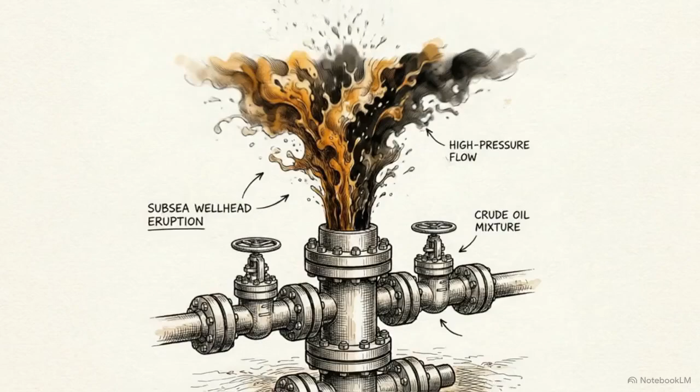What comes out of an offshore well is not ready for the market. It blasts upward from the reservoir as a dark, turbulent, multi-phase fluid. This stream is a chaotic mixture of crude oil, natural gas, formation water, and abrasive sand.

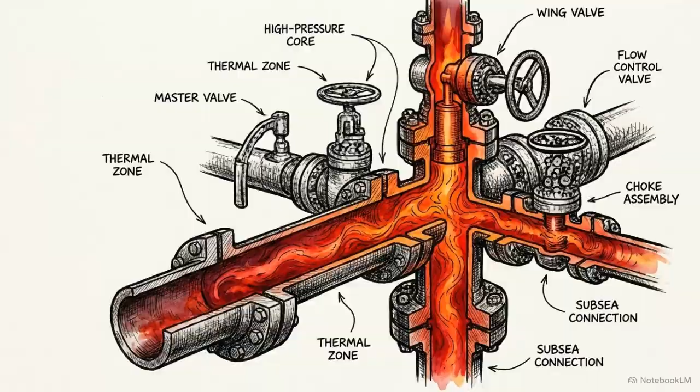It arrives at the wellhead under crushing thermodynamic conditions, sitting at pressures up to 3,000 pounds per square inch, roughly 200 bar. In this raw, high-pressure state, the fluid cannot be accurately metered, it cannot be pumped efficiently, and it cannot be transported through 100 miles of subsea export pipeline.

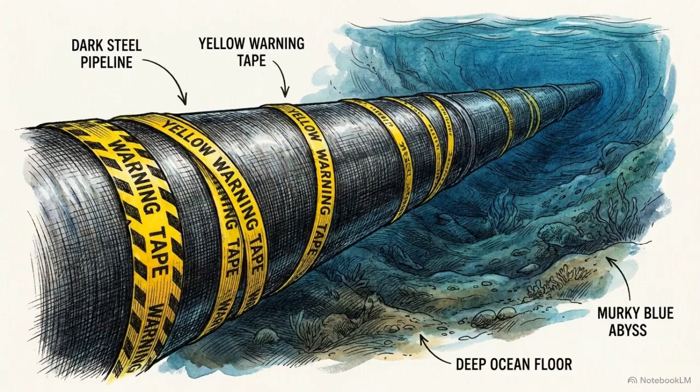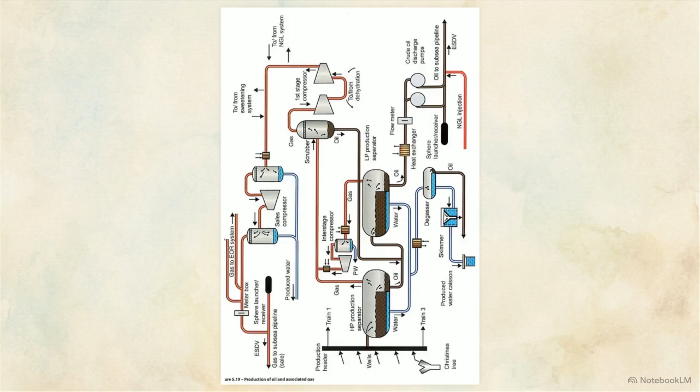The offshore process plant exists to execute a precise thermodynamic and gravitational decoupling of that fluid. To achieve this, engineers utilize a massive, interconnected macro-architecture. The lower sections isolate the liquid processing, utilizing high and low pressure separators to stabilize the crude oil. The upper sections handle flow assurance, routing gas through scrubbers and compressors for transport.

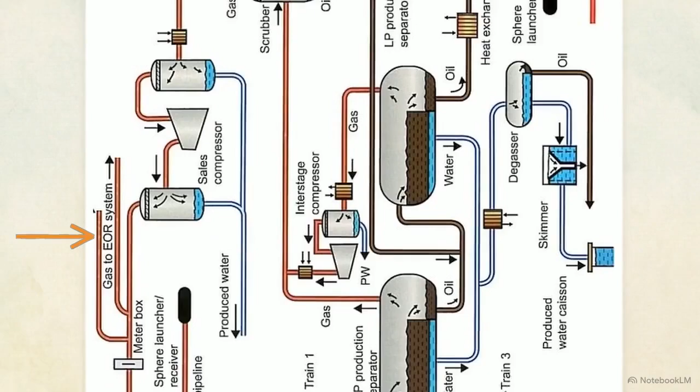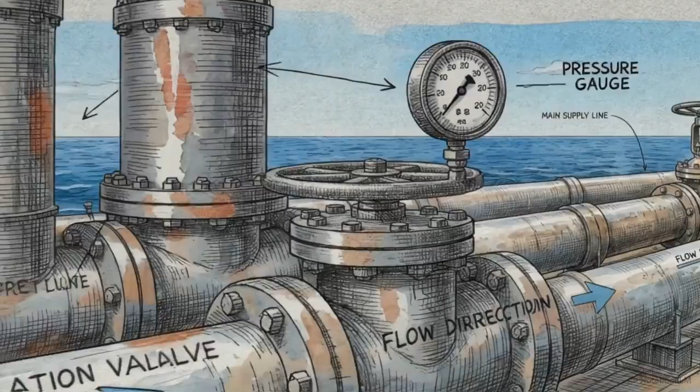Meanwhile, dedicated lines send a portion of gas back down into the reservoir for enhanced oil recovery, maintaining pressure to keep the well flowing. The offshore platform functions as a live phase and pressure engine, the only mechanism capable of forcing geological chaos into predictable, stable export commodities.

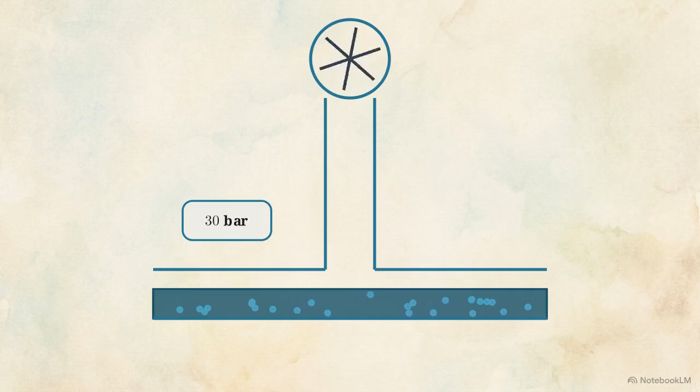The separation process begins with a mandatory pressure drop. The well stream must be depressurized to allow the intermingled gas to break free from the liquid oil. If you drop the pressure all at once, say from 30 bar straight down to 1 atmosphere, the result is violent. The dissolved gas flashes instantly, creating heavy foam and forcing liquid to surge upward into the gas outlets.

That liquid carryover travels downstream and enters the gas compressors. Compressors are designed strictly for vapor. Hitting them with dense liquid droplets causes catastrophic mechanical destruction. The engineered solution is a controlled, stepped pressure cascade. By staging the pressure reduction across a series of vessels, the gas releases gently, protecting the downstream machinery.

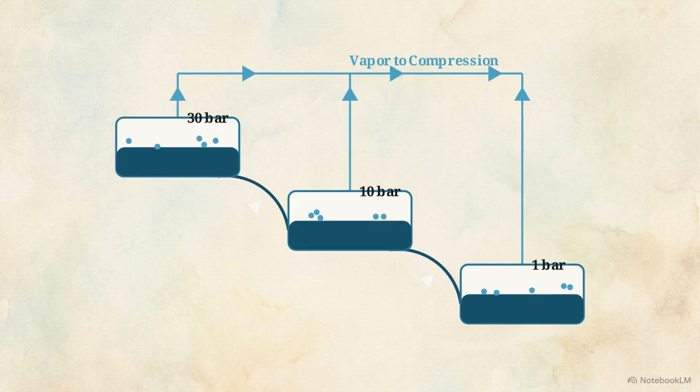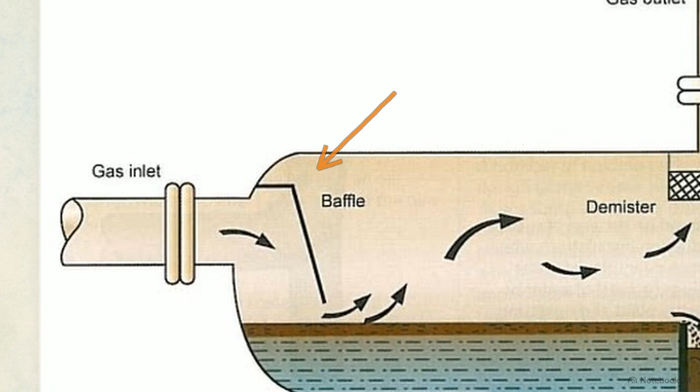The primary vessel in this sequence is the horizontal 3-phase separator. As the high-pressure well stream enters the vessel, it strikes an inlet diverter baffle. This physical barrier abruptly kills the fluid's forward momentum, forcing the initial separation of heavy liquids from lighter gases.

From there, gravity stratification takes over. Because of their varying specific gravities, gas rises to the top of the vessel, heavy formation water sinks to the bottom, and the oil floats securely in the middle.

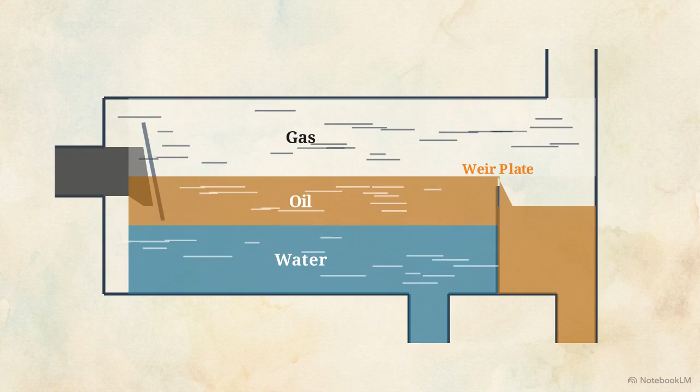An internal weir plate acts as a physical dam. The floating oil continuously spills over this weir into a dedicated collection section, while the heavier water remains trapped behind it. Above the liquid, the escaping gas passes through a demister mesh pad. This pad coalesces microscopic liquid droplets, ensuring they fall back into the liquid pool before the gas exits the vessel.

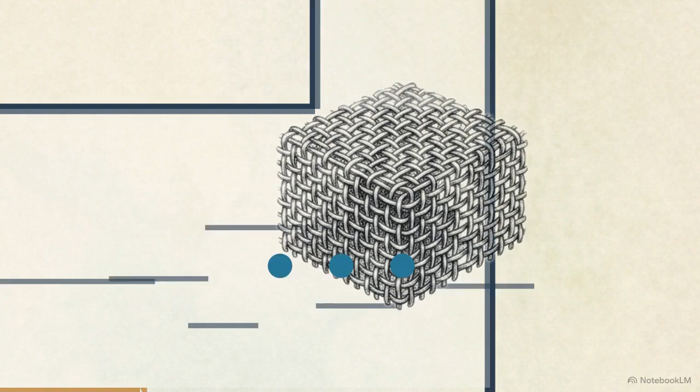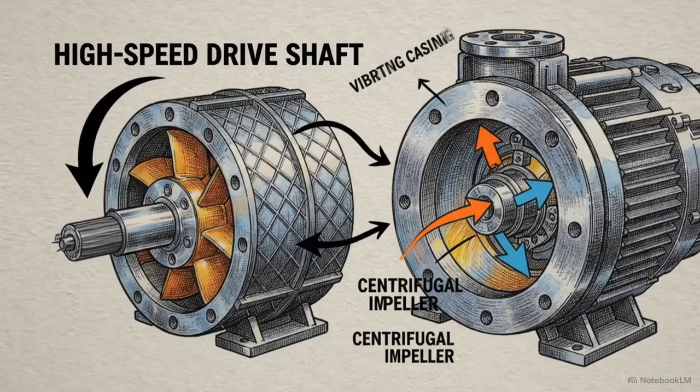The separated oil then flows into a series of low-pressure degassing drums, systematically stripping out the final traces of dissolved gas. Once stabilized, this oil meets the export pumps, which elevate its pressure back up to 750 psi, forcing it into the subsea pipeline network.

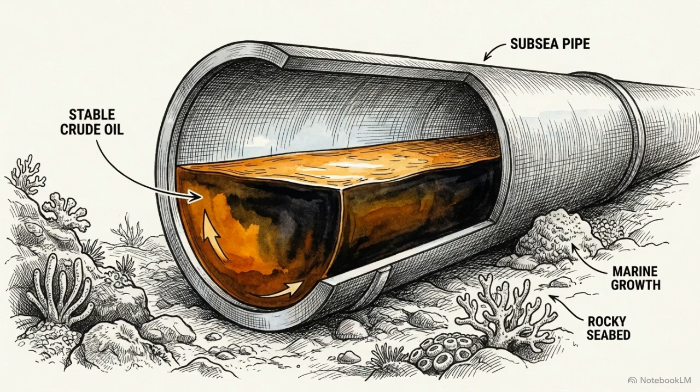This multi-stage separation process yields dead crude, a liquid stripped of volatile gases, rendered stable enough to survive the physical stresses of long-distance transport. While the crude oil is now stable, the separated gas stream presents a different engineering hazard.

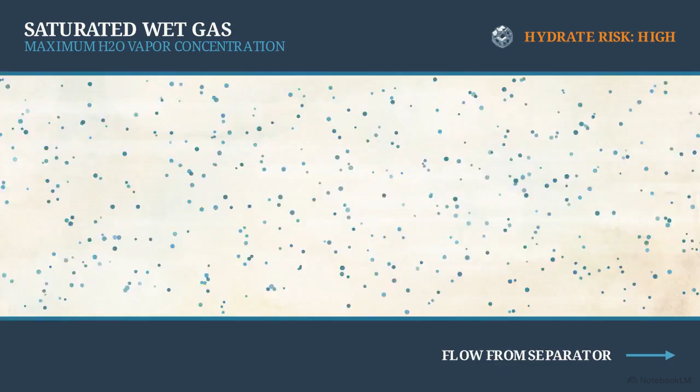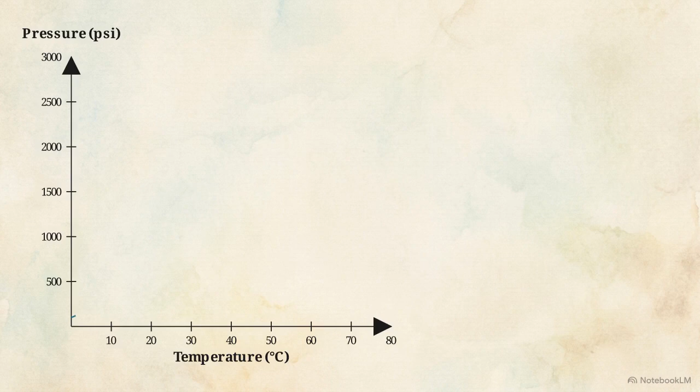As it exits the separators, it is completely saturated with water vapor. If this wet gas enters a cold, high-pressure subsea pipeline, it faces immediate thermal shock. This phase envelope graph plots pipeline pressure against temperature. The shaded region indicates the hydrate zone, the exact conditions where high pressure and near-freezing seabed temperatures intersect.

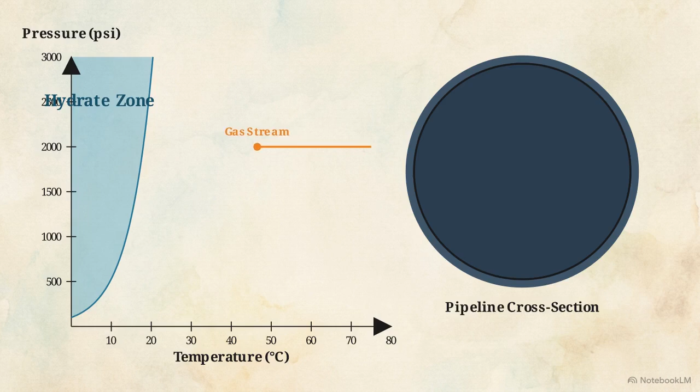When the gas stream crosses into this zone, the water and hydrocarbon molecules physically lock together. They form hydrates, solid ice-like crystalline structures that rapidly aggregate and can entirely block a pipeline.

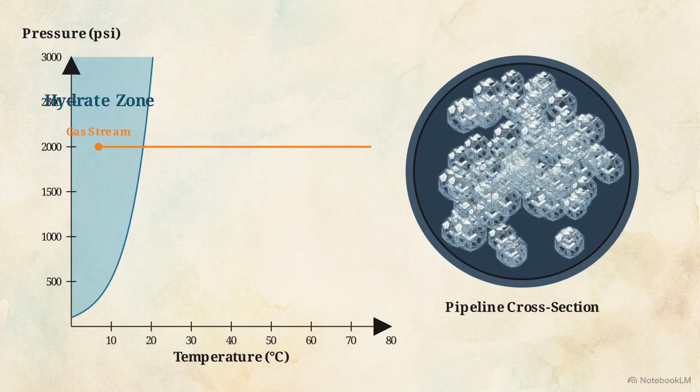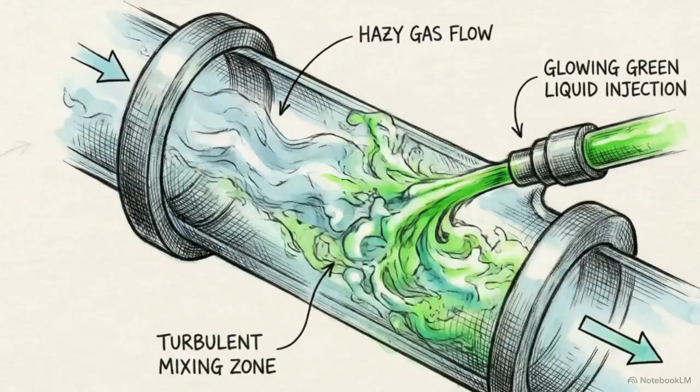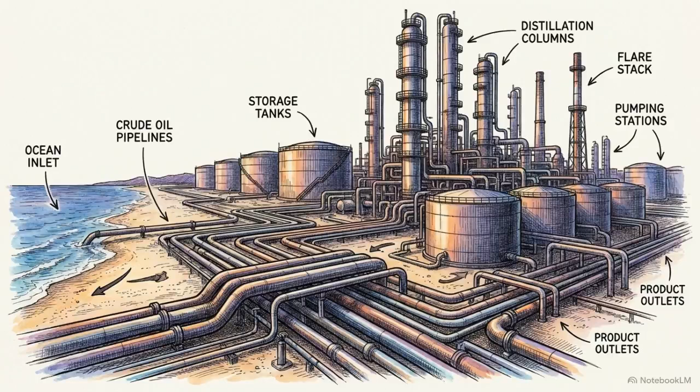The first line of defense is chemical flow assurance. Engineers inject inhibitors like monoethylene glycol, or MEG, which alter the fluid's chemistry to shift the hydrate formation threshold to a lower temperature. However, exporting gas directly to onshore refineries requires a stricter solution. The gas must be physically stripped of its water entirely.

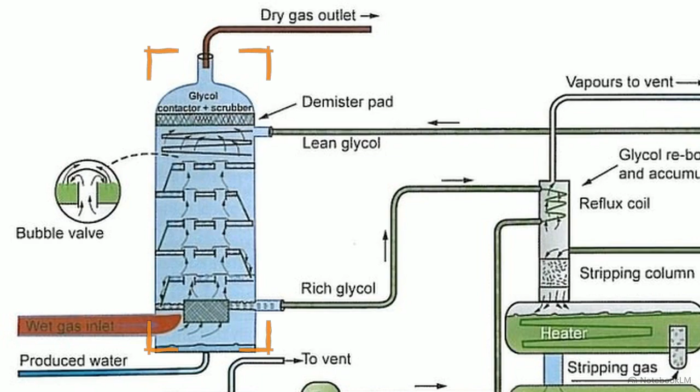To achieve dry gas export, platforms rely on a triethylene glycol, or TEG, dehydration system. Inside the vertical contactor tower, countercurrent physics drive the dehydration. Wet gas flows upward from the bottom, while dry, lean glycol cascades downward across multiple trays.

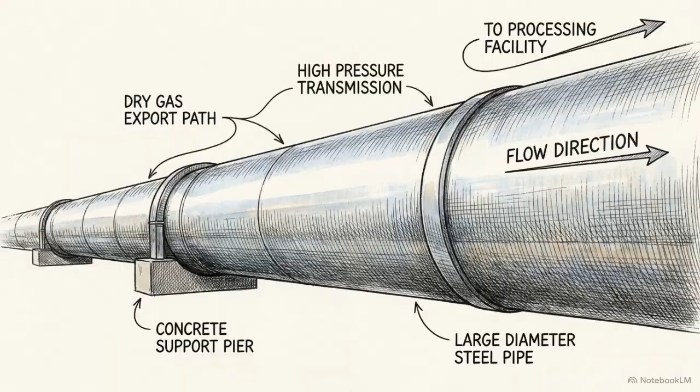Bubble valves on these trays force the rising gas to physically percolate through the liquid glycol. The glycol acts exactly like liquid blotting paper, absorbing the water vapor directly out of the gas stream. The gas exits the top dry and ready for export, while the water-saturated, rich glycol pools at the bottom and is routed to a regeneration reboiler.

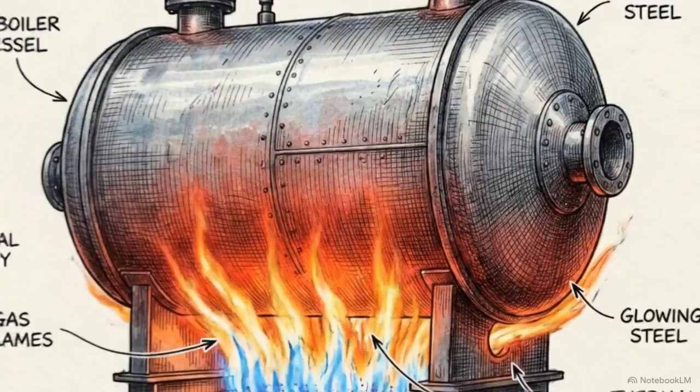The rich glycol is routed to a regeneration reboiler. The reboiler's job is to boil the trapped water out of the glycol, so the chemical can be reused. But this creates a severe thermal constraint. To guarantee the water vaporizes, the temperature must reach 200 degrees Celsius.

At 204 degrees, however, the TEG chemically breaks down into highly corrosive acids. Plant operators must thread a razor-thin 4-degree margin of error.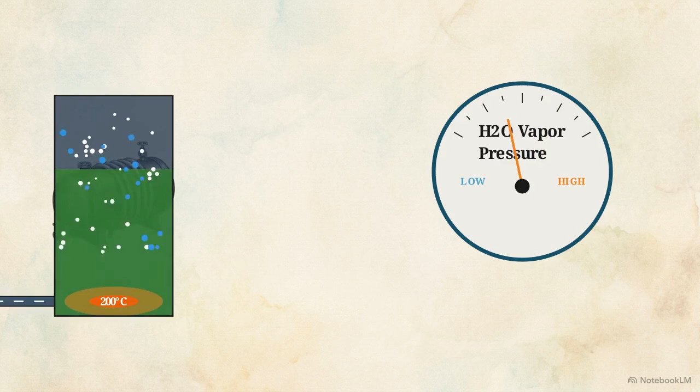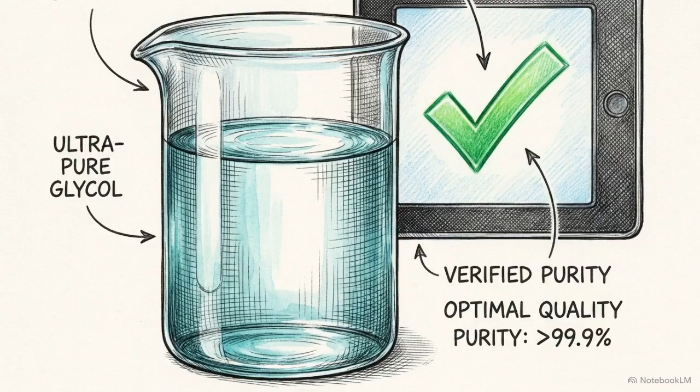The workaround relies on partial pressure. By injecting a stream of dry stripping gas into the boiler, engineers artificially lower the partial pressure of the water vapor. This pulls the water out of the glycol at lower temperatures, achieving 99.9% purity without ever crossing the thermal limit. Without this thermodynamic manipulation of glycol and partial pressures, the formation of solid hydrates would rapidly render multi-billion-dollar pipeline networks physically impassable.

Extracting fluids topside is only half the engineering equation. The other half occurs thousands of feet below the seabed, inside the reservoir rock.

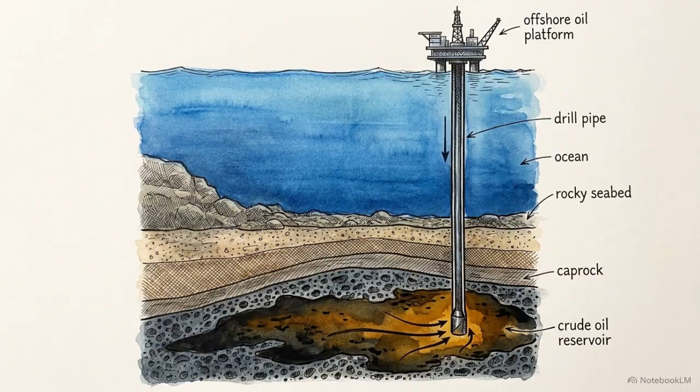This chart tracks reservoir production decline. As oil is extracted, formation pressure falls, approaching the minimum flowing wellhead pressure. Natural drive extracts only 10 to 30% of the oil before pressure drops below this threshold, causing production to flatline.

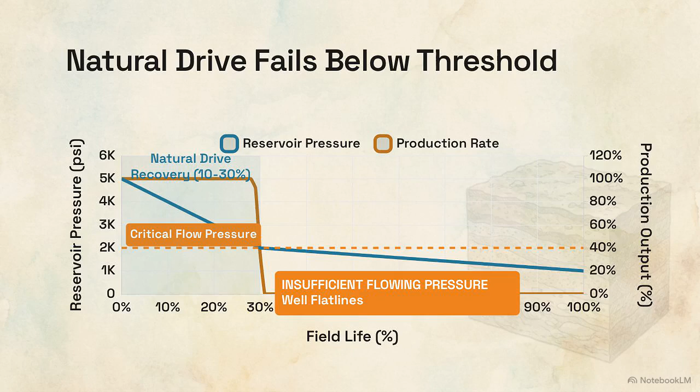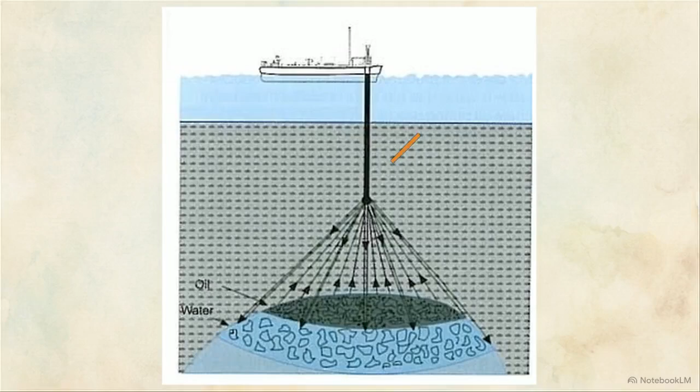To extend the life of the field and keep the fluids moving, operators must implement enhanced oil recovery, or EOR. The dominant EOR strategy is peripheral water injection, pumping treated fluid down to restore reservoir pressure. Engineers drill wells into the formation's flanks. Forced into the periphery, water physically displaces the remaining oil, driving it horizontally toward the central production well.

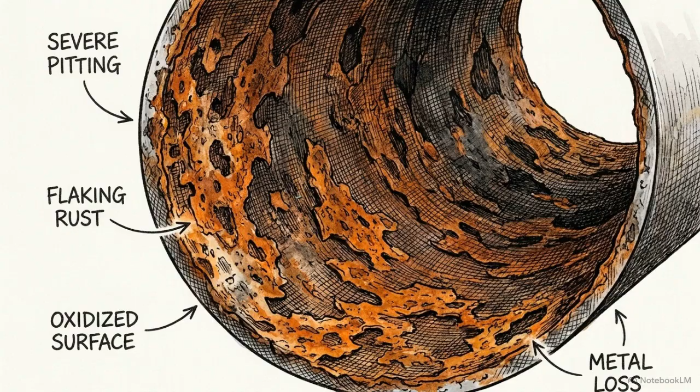The most abundant source of injection fluid is raw seawater, but pumping untreated seawater underground introduces a severe chemical hazard. It contains high levels of dissolved oxygen, typically around 9.25 parts per million. Injecting that oxygenated water causes rapid downhole pipe corrosion. Worse, it feeds sulfate-reducing bacteria in the rock, which multiply and sour the reservoir with highly toxic hydrogen sulfide gas.

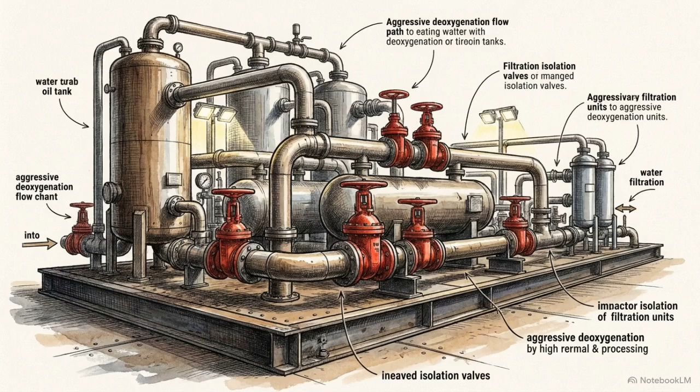Before a single drop of seawater enters the injection well, it must undergo aggressive deoxygenation. Many platforms use the Minox deoxygenation system, a compact alternative to vacuum towers. Seawater passes through static mixers, where a methanol catalyst triggers a reaction, crashing oxygen from 9 parts per million down to less than 10 parts per billion.

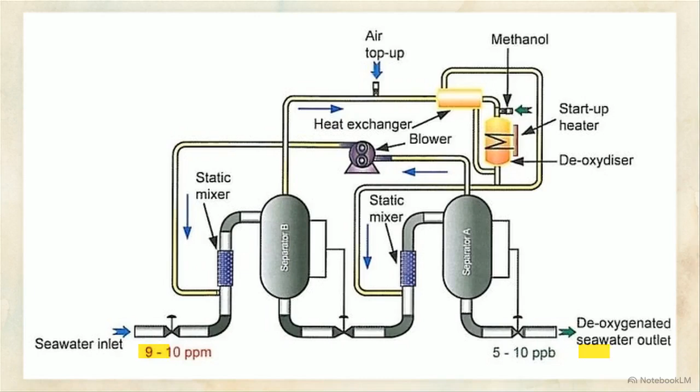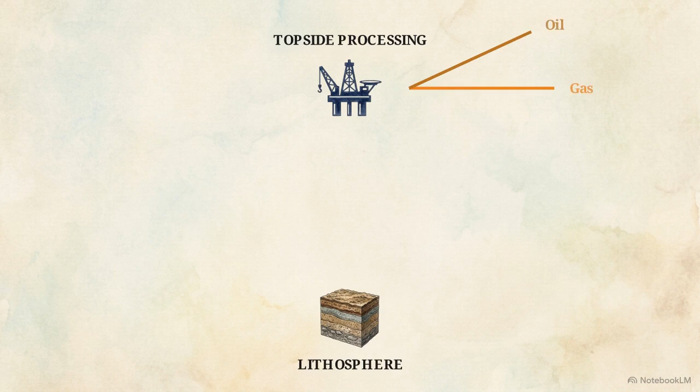The offshore platform operates as a closed thermodynamic loop. Engineers meticulously decouple fluid phases topside to extract the product, while aggressively engineering pressure back into the lithosphere to ensure the system survives.